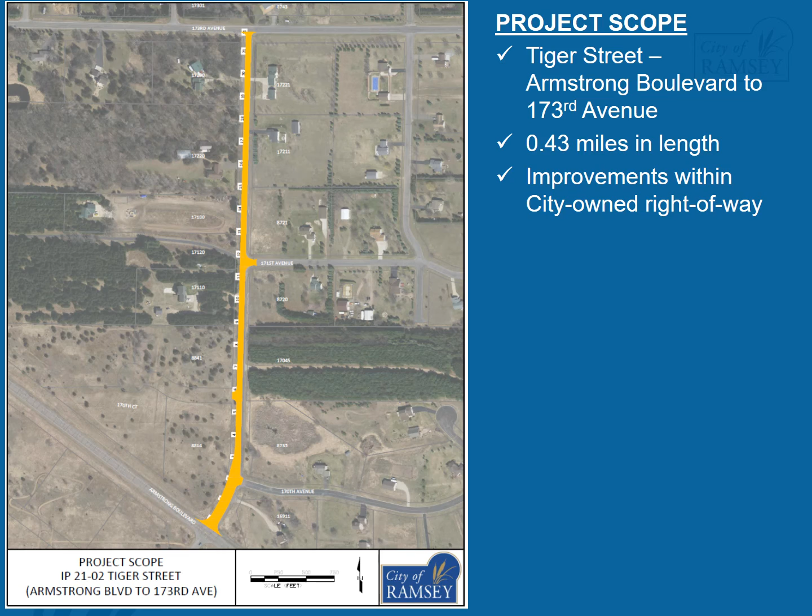Tiger Street was constructed in 1991 as a 24-foot wide rural section street. Stormwater is directed to drainage swales on both sides of the street, which carry runoff to low points near 170th and 171st Avenues. Ground penetrating radar, GPR, was performed on the street. GPR takes a reading of the ground at 1-foot intervals and can determine the thickness of bituminous pavement and aggregate base. GPR results found an average of 2.5 inches of bituminous pavement and 3.3 inches of aggregate base on Tiger Street. No public utilities exist in the project area.

On an annual basis, city staff reviews every street segment of the city using the Pavement and Surface Evaluation Rating. The rating scale is from 0 to 10, with 10 being a new pavement. Tiger Street received a rating of 2, which is the lowest rating given to any street within the city. The pavement received seal coat improvements in 1997 and 2004, and a pavement overlay in 2006. Since that time, the only maintenance performed on Tiger Street has been pavement patching.

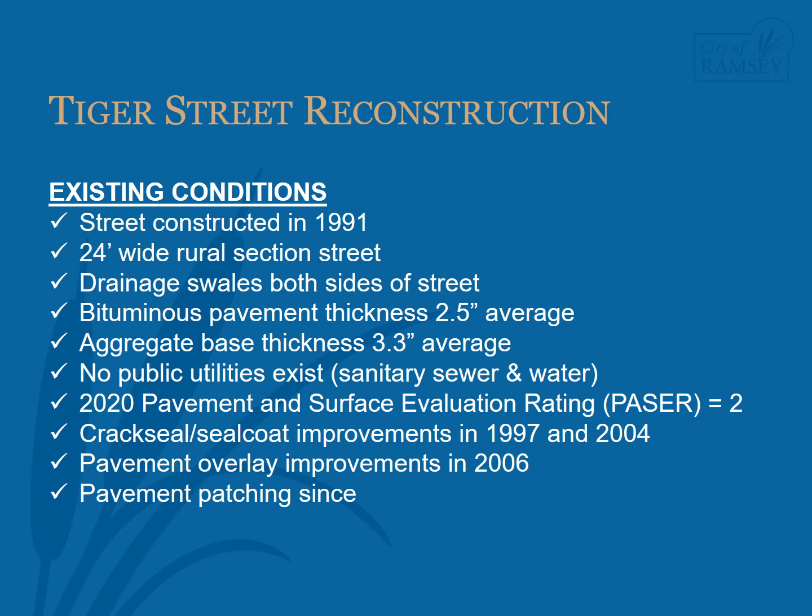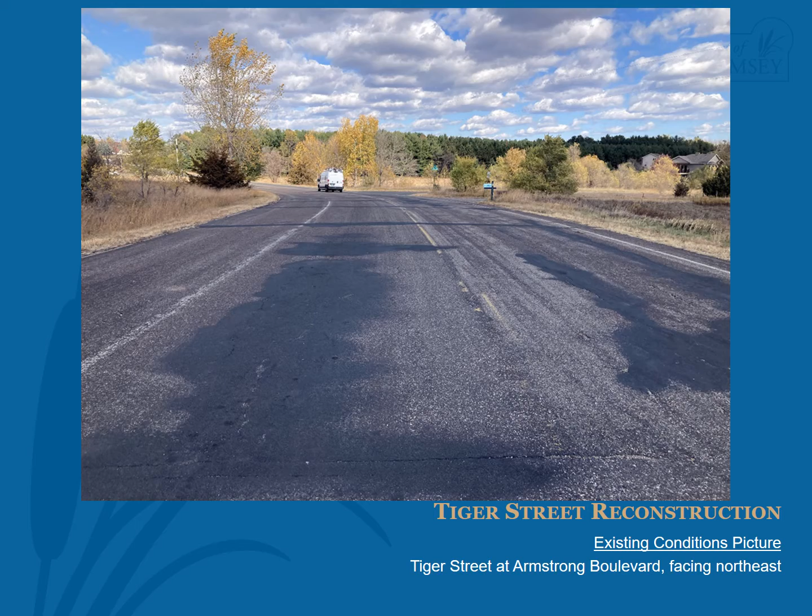The existing conditions pictures were taken in the fall of 2020. This picture was taken on Tiger Street at Armstrong Boulevard, facing northeast. Though the lines are faded, we can see the additional protected turn lane for movements onto Armstrong Boulevard. The road has quite a bit of exposed aggregate, and the darker pavement sections are the results of spray patching. This picture was taken on Tiger Street, north of 170th Court, and is facing south towards Armstrong Boulevard. The road has severe alligator cracking and has received several pothole patches as well as spray patching.

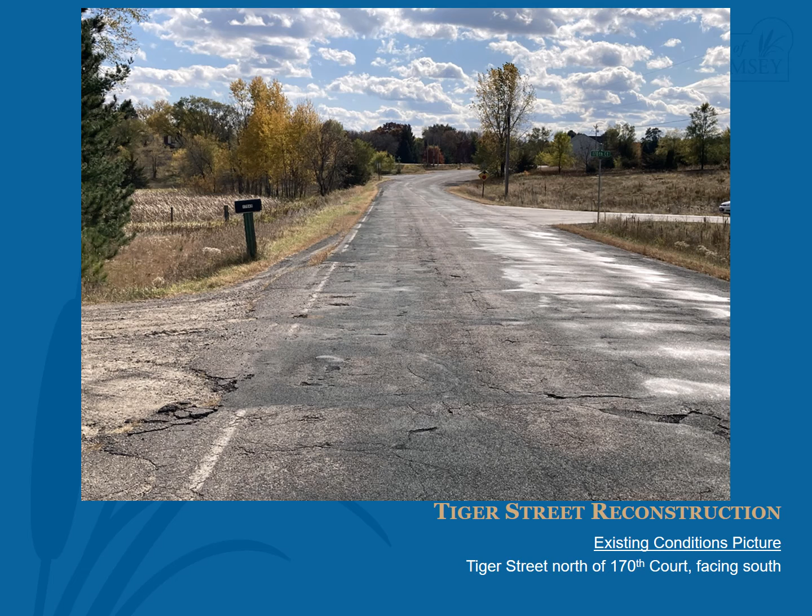This picture was taken on Tiger Street at 170th Avenue, facing north. We can see exposed aggregate, which leads to potholes. The darker areas are spray patching, and we can see to the north much of the road surface has been patched in recent years.

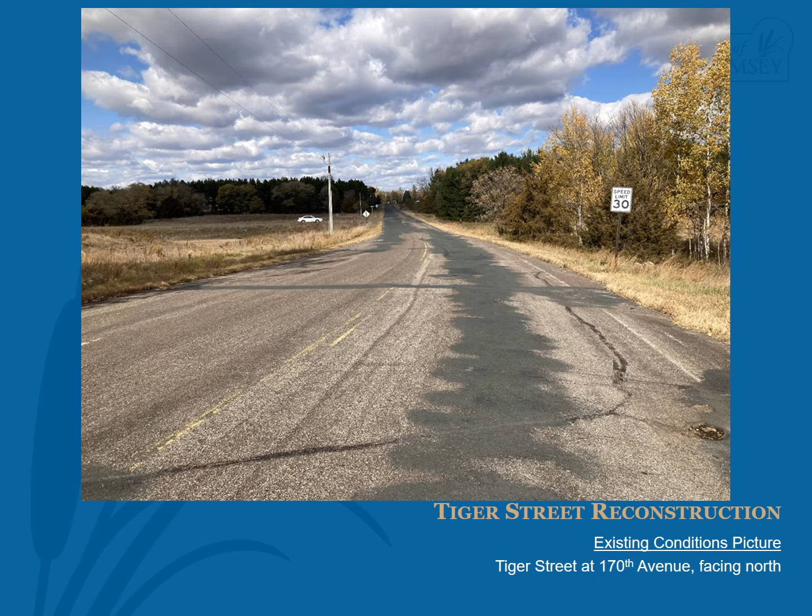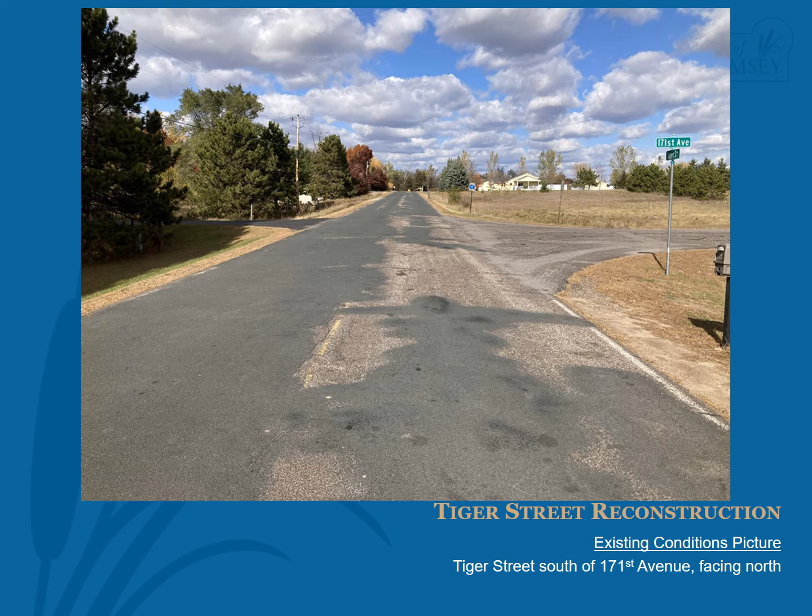This picture was taken on Tiger Street, south of 171st Avenue, facing north towards 173rd Avenue. The road has received spray patching almost across the entire width in this section of Tiger Street. Though the spray patching covers the potholes, this level of patching is an indication that the road does not have much longer before it is essentially rubbleized, and reconstruction is needed in the near future.

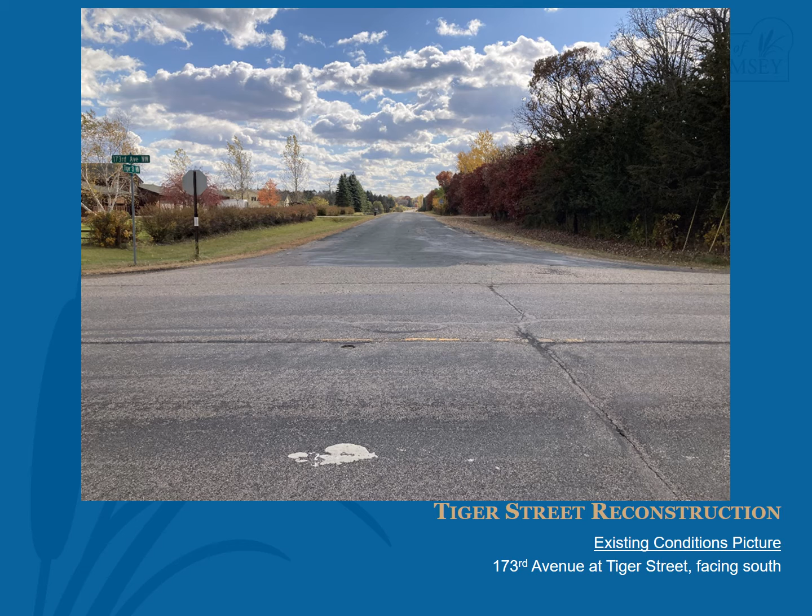This picture was taken on 173rd Avenue, facing south towards Tiger Street. This is the north end of the proposed improvements. This project proposes to reconstruct Tiger Street back to the existing width, 24 feet, and generally to the same elevation.

During design, staff reviews the profile of the street and confirms it meets vertical and horizontal curve design requirements, which are based off stopping sight distance. From field review, it is not expected modifications to the existing profile will be necessary. The project will also match the existing turn lane configuration at Armstrong Boulevard.

The goal of all City of Ramsey reconstruction projects is to leave the existing driveways in as good or better condition than before the project started. We will have to remove and replace the bottom of the driveways within the right-of-way to properly match into the new bituminous pavement. Our policy is to match the existing material. If it's bituminous, we put back bituminous, concrete gets replaced with concrete, and gravel gets replaced with gravel.

We also do our best to match the existing grade of the driveway as to not create hinge points where the connection is made. During the project, we will give advance notice of when driveways will be removed and replaced so you can plan accordingly.

If you have a concrete driveway, please be aware concrete requires 5 to 7 days to build strength before it can be driven on. During the project, you will always have, at a minimum, walk-on access to your property at the end of the workday, but for the majority of the project, you will have drive access as well.

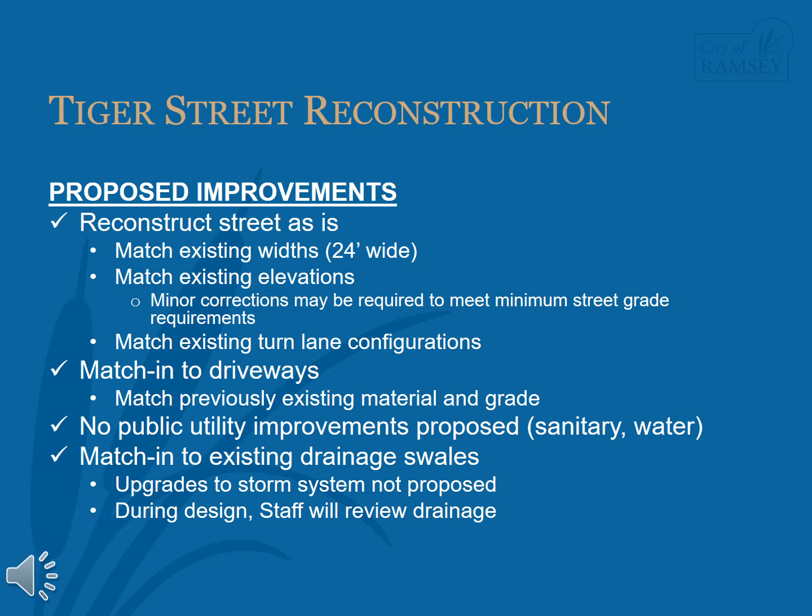The geotechnical report staff received this fall indicated small amounts of topsoil materials directly below the pavement section in 3 of the 10 soil borings taken for the report. Though the topsoil layer was found to be 6 inches thick or less, it's critical to not have organic soils within the top 3 feet of subsoils below the pavement section, since they will settle at different rates than the surrounding base materials and are more susceptible to frost heave.

Due to this, some minor subgrade corrections will be required, though the extent will not be known until the pavement section has been removed. The anticipated build process will be to remove the existing pavement, aggregate base, and subgrade materials as needed. City staff prefers the bituminous pavement and aggregate base are reclaimed, ground in place, stockpiled, and reused as the new aggregate base, as this reduces trucking and mining operations.

It should be noted, however, that generally, whichever contractor is awarded the contract will have control over how they remove the pavement. Giving the contractor some flexibility tends to bring in better bids.

Following the removal of the pavement, aggregate, and excavation of any subgrade materials, the subgrade will be shaped and compacted in preparation for the new aggregate base.

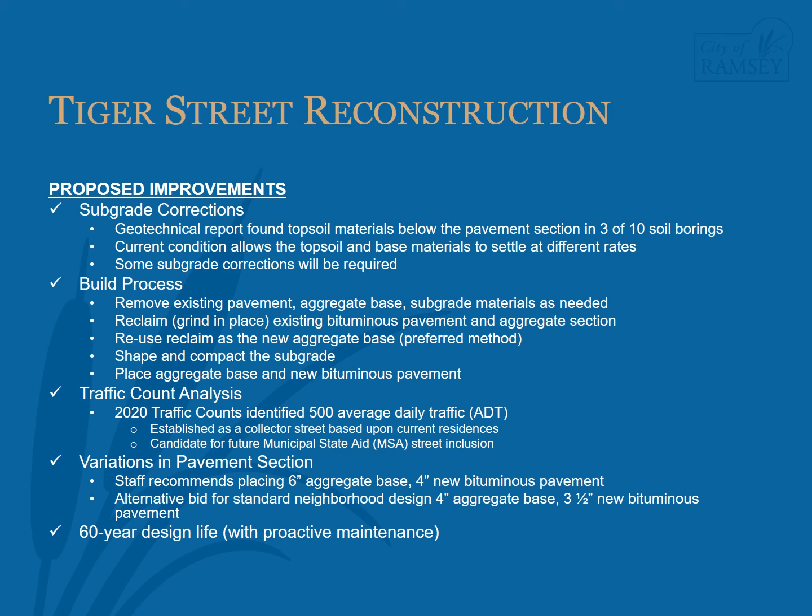For reference, the existing pavement section includes 3.3 inches of aggregate base and 2.5 inches of bituminous pavement, so either design will improve the structural capacity of Tiger Street. The design is expected to have a 60-year design life with proactive maintenance.

During preliminary design, staff estimated project costs to be $380,000. This includes 10% contingency costs and 23% indirect costs. Indirect costs include administration, engineering, finance, and legal costs associated with the project. The project is proposed to be funded with a combination of pavement management funds and stormwater utility funds. There will be no assessments associated with this project.

After much discussion, the City Council has adopted ordinances implementing franchise fees for gas and electric services. These fees are collected by the private utility companies and are dedicated to the Pavement Management Fund. Legally, these funds can only be used for pavement overlays and reconstruction projects.

Of the $380,000 estimated for the entire project, $360,000 will be funded through the Pavement Management Fund. The remaining $20,000 will be funded through the Stormwater Utility Fund and is for activities such as replacing culverts.

So far, this project has been in front of City Council twice. On December 8th, City Council accepted proposals for a geotechnical report and a separate proposal for a topographic survey of the project area. Both are necessary for project design. On January 12, 2021, City Council ordered plans and specifications for the Tiger Street Reconstruction project.